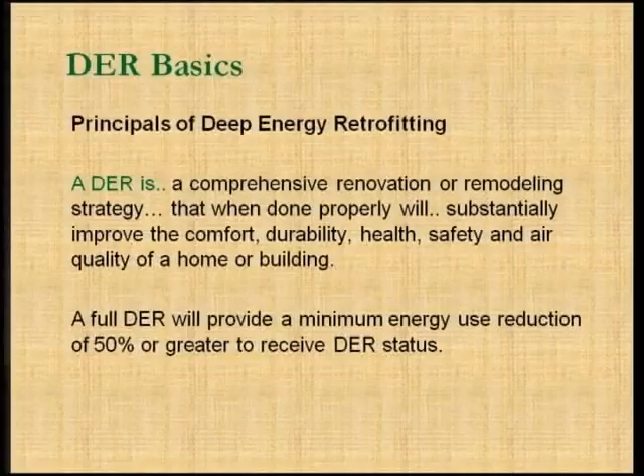There's nothing wrong with phasing retrofits, where each piece you do plans for the next piece. But once you get to that minimum 50% reduction, it's like your badge of honor to get your deep energy recognition. So this is an 1845s colonial.

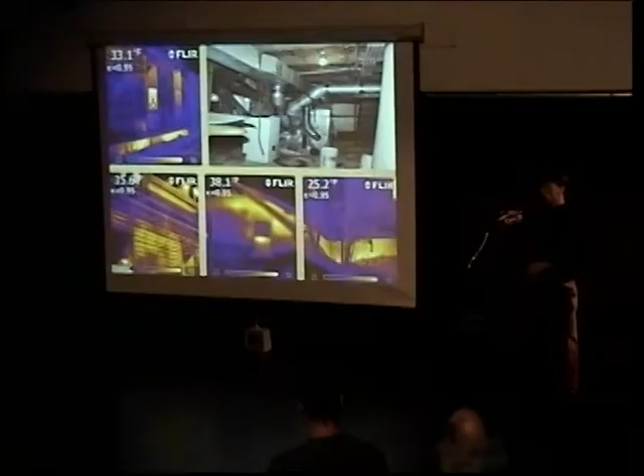As you can see with these infrared scans—for any that don't know how to read an infrared camera—from the exterior, yellow indicates heat loss and blue or purple is the colder temperature. When you're outside on a cold day, you want the infrared camera to be reading cold, because when it's reading yellow, that's the amount of heat coming out of your house unnecessarily.

As you can see to the left, the foundation is reading yellow. We've got some blotchy patches on the wall, a bunch of missing stuff up on the gable end, and of course the massive heating system it requires to compensate for all that heat loss.

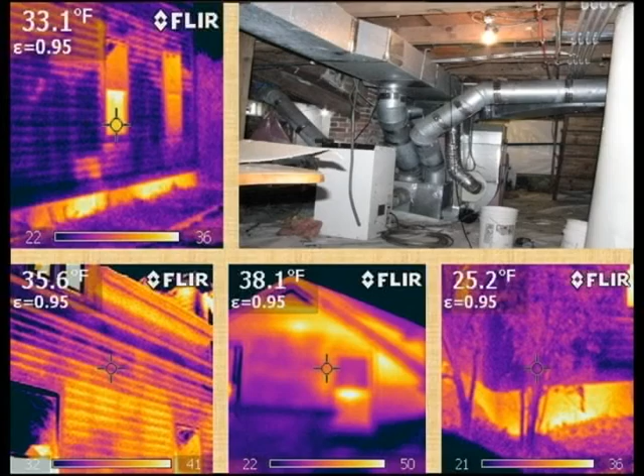And the project details: the blower door reading, a tool we use to measure how drafty a building is. It fits into a full-size doorway and creates a negative pressure in the house by sucking all the air out with a big fan, and it tells us how much air is moving through the building in cubic feet per minute. So if you figure 1 cubic foot per minute at 50 pascals, which is what the pressure is simulated at for the wintertime, we had a reading of 8,600 CFM.

Imagine 8,600 cubic feet every minute going out the window. And with that came frozen pipes in the winter, bad air quality and mold, and an old heating system that was just burning oil as fast as it could.

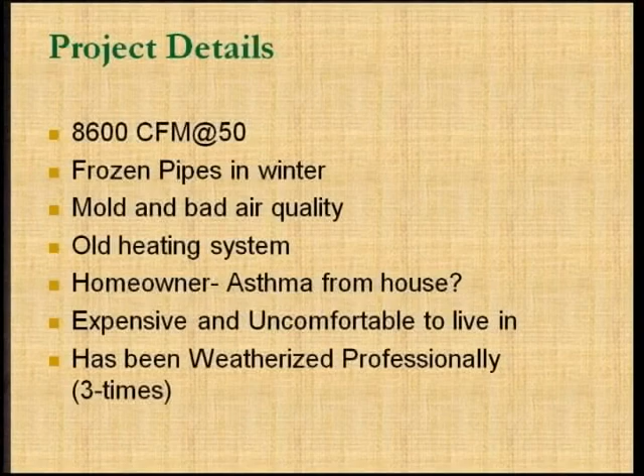The homeowners are actually pretty convinced that they have asthma from the mold in the house, and it was very expensive and uncomfortable to live in. It wasn't from a lack of trying—they actually had the house weatherized by the local weatherization programs and a professional, even after the fact. So after multiple attempts, these were still the problems that came about.

So the science behind a deep energy retrofit is no different than the science involved with weatherization work, but we just try a lot harder to get it to work out. We're still dealing with the same building envelope. The building envelope manages moisture, temperature, and changing conditions from the interior and exterior, and includes all spaces, including the basement, and whether you decide to condition your attic or not.

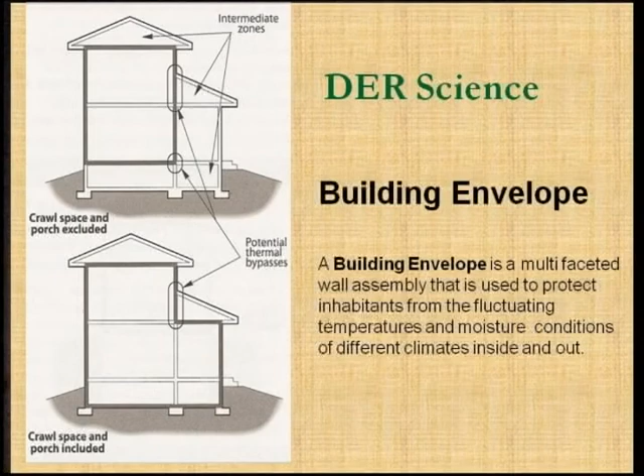As you can see here, and I'm sure you've had in your homework, there are multiple different ways you can go about defining where that envelope is. The big thing is to make sure that wherever you draw your line, you put meticulous detail into the connections at the corners and all the different components. You don't leave any sections out, because that's where the rest of your insulation can go for naught.

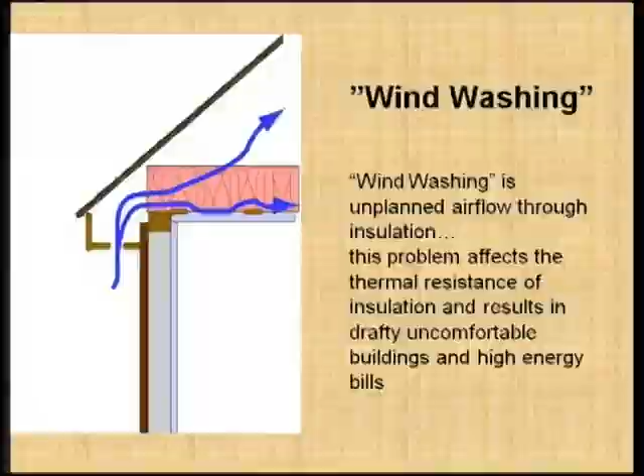Wind washing is one of the biggest problems we deal with in deep energy retrofitting, because a lot of insulation can get placed, but is it actually working properly? That's where you get these big CFM readings, like 8,600 cubic feet per minute, yet the house has been insulated—it's been dense packed.

What's going on here? There's insulation in the attic. I can't even tell you how many times a homeowner tells me, 'Well, my house is insulated. I don't know what more I could possibly do,' because they see insulation in the walls and ceilings. They just don't know how much they need or if it's actually working properly. Again, wind washing is the biggest culprit of energy loss.

Here are some infrared scans that show what happens with wind washing.

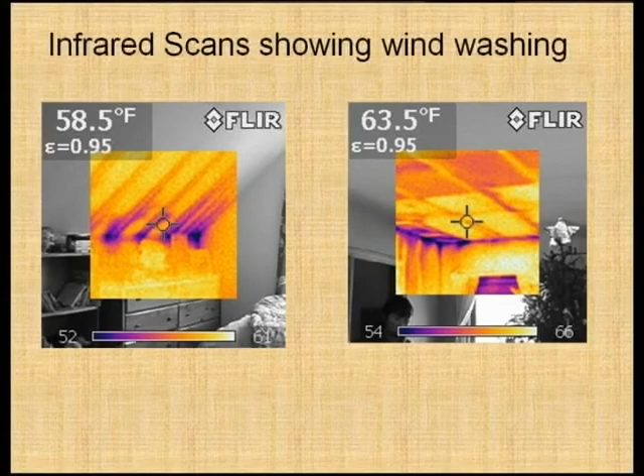This is to the left - you can see it's a cathedral ceiling that's gone up, and these ceilings are insulated with an R38, and yet there's that much cold just oozing right into the building. So as you can see, it's not about what the R value is. You're not getting a true R value if you're not stopping the air from flowing through it.

So what we're going to talk about today on this project - this is back to the Montague project that you saw - is why there's so much air flowing through the building, and why 3 different contractors have tried to fix this project and have not.

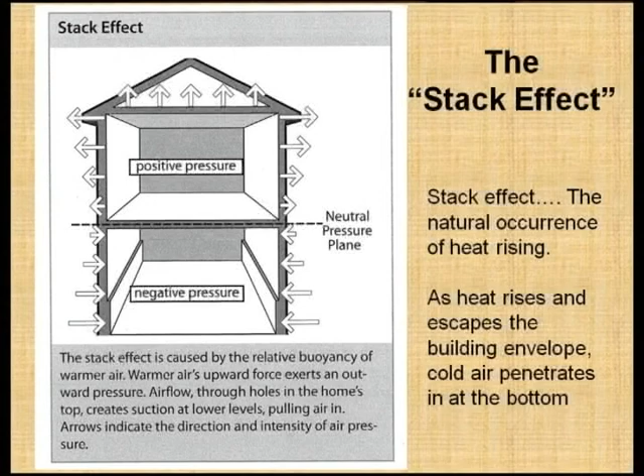I'm sure you guys are familiar with the stack effect - the positive and negative pressures of a house. The top part of the house has the greatest pressure as the heat tries to escape through the top of the envelope, but at that point it needs to draw in fresh air from somewhere, so the other greatest pressure is at the bottom. The negative pressure is at the bottom, which is why we don't always look to windows as the first place to start, because they're at more of a neutral pressure plane than at the top and the bottom.

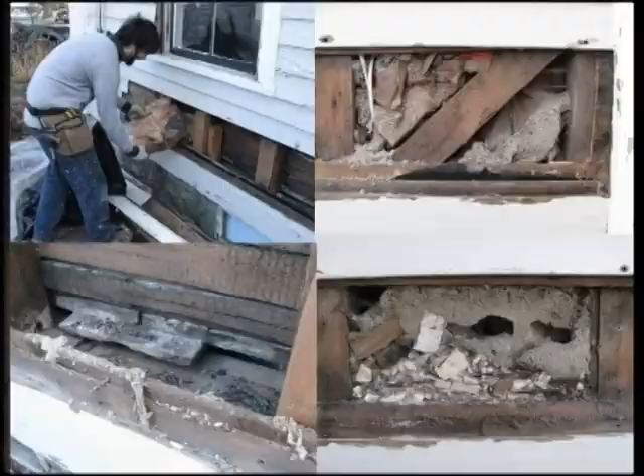So here's some up close and personal shots on what the cavities looked like. This is what ends up happening in a lot of weatherization projects - there's no budget in those programs to allow you to clean cavities and really try to do things meticulously. What they expect you to do is just dense pack on top of whatever is in there, and that's why there's so much airflow. These are the cavities - you end up with a lot of bracing, and you can't do the amount of investigation that you allow for through a deep energy retrofit.

Top left corner, you can see we're taking out chunks of fiberglass that are in there. Bottom left corner, you can see that's the sill, and it's completely connected into the basement. So what you've got here is just some random chunks of fiberglass and cellulose mixed, as well as some trash and debris. The air flows right on by that, and you get cold floors, you get drafty rooms, and it makes it so the heating system just has to run constantly.

So here's what our remediation plan was for that - basically put a good amount of time into cleaning it out, which isn't rocket science. The term deep energy retrofit does have an intimidating kind of presence to it, but really, it's the same science - you're just doing a really good job, and it's all about attention to detail. So as you can see, top left corner, we're just cleaning it out - that's no big deal.

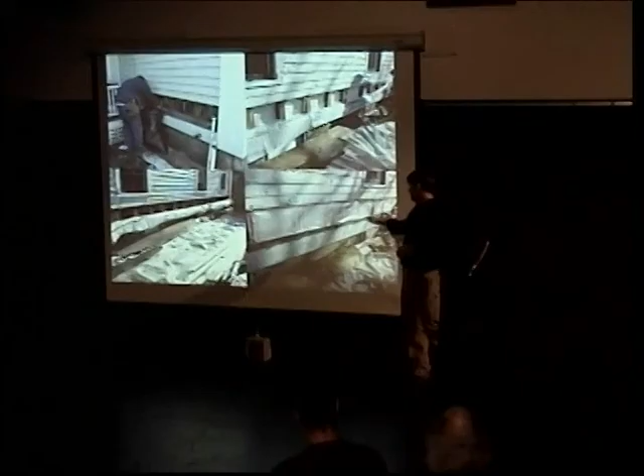We also spent some time below the rim board here, foaming and caulking. So really not rocket science at this point, right? This is all stuff that we're all capable of doing. It's just a matter of, again, doing a really good job and paying attention to what we're trying to do and thinking about how we're going to do it.

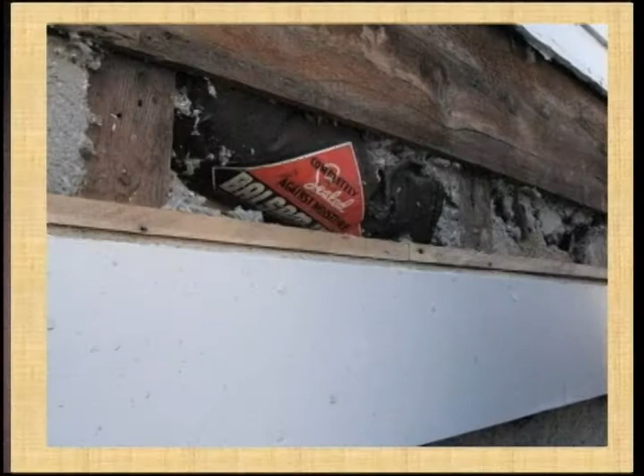I took a photo of this here because this is the old balsam wool insulation, one of the batts that was stuffed in there. You can see the label, completely sealed against moisture. I guess when it's done properly, but sitting there like that, no, it's not going to be sealing anything against any moisture at all. But it's just interesting to see how products are sold through generations and they're marketed to be certain things.

But just like anything else, if you're not using the products properly, they're not going to perform the way they're supposed to perform. So when you're doing a deep energy retrofit, it's all about making sure that the products you're using are being used properly and are working with all the other system components.

Unfortunately, that wasn't the biggest challenge of this project. Obviously, that's one of the low-hanging fruits for us compared to what we're about to get into. There were a lot of crawl spaces on this project, and we're going to see what some of the more challenging aspects of a deep energy retrofit might be, where you go where other programs won't let you go.

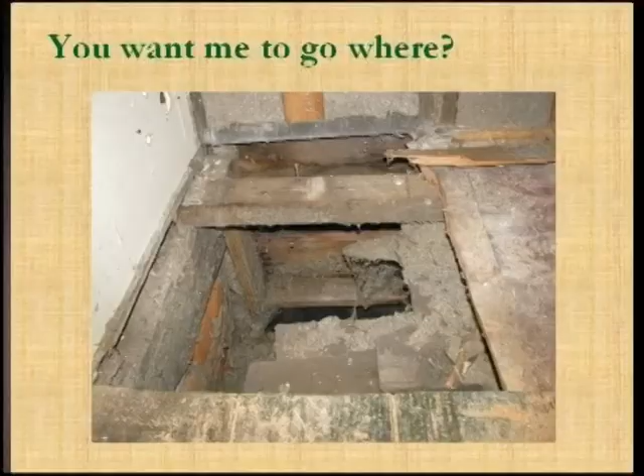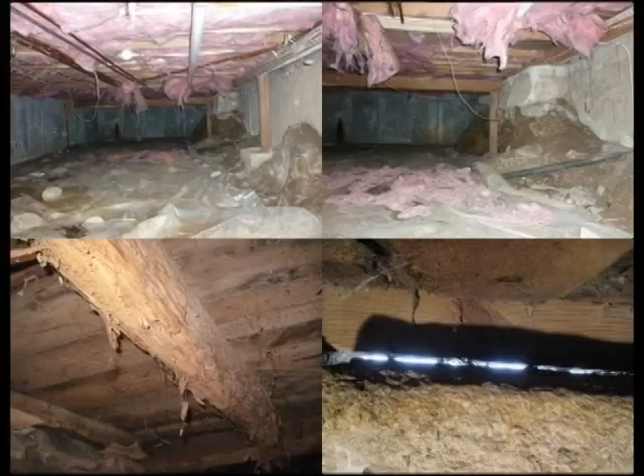So what that was is a photo of us cutting open a section of floor where the frozen pipes were. The homeowner, you got to interview your homeowners, right? They're going to tell you things that may not be building science, but they're going to tell you, well, it's a really cold room, or I feel a draft here, and you make all your notes and you pay attention so that it helps you with your targeting investigation so that you know where to start. Because some of this stuff you're just going to be scratching your head, all right, what am I going to do?

There's been numerous opportunities to do this the right way, including an addition that was put on 8 years ago, where this connection between the old part of the house and the new addition was actually a shed. They built a floor system over it and didn't bother insulating it properly, or pouring a foundation for that matter. This photo to the right is the before of the photo to the left, where we actually had to pour a new foundation footing because there were just granite slabs up on edge and that beam was hanging by the wall assembly. So there was nothing supporting that portion of the house.

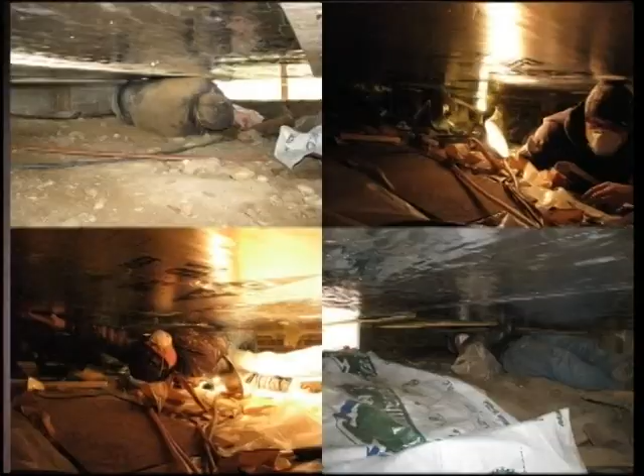You don't want to overbuild either. A lot of times you end up with floors that have got some give to it, but they've had some give to it, so as long as you're protecting it moving forward, that's the most important piece. So here you see what we did do in order to protect the wood and insulate properly is we ran rigid polyiso board on the bottom sides of all those joists.

As difficult as it might be. I mean, these are reality shots where you can barely fit your body into these environments. It's quite an interesting feeling when you're lying on your back and your nose is touching the foam board and it feels like the house is actually sitting on you. But this is what it takes sometimes. Not all the time. Not all deep energy retrofits look like this, but I'm going to show you what can happen and how to deal with that.

I can show you a couple of simpler things, like we do easier projects as well, but these are some of the things that you do end up running into, and we're going to end up coming into a time that people are faced with, okay, we've got all these old colonials, that's a classic for our area, and some of them are not going to get rebuilt, and they're not going to be affordable either, as fuel continues to rise and we merge into the 21st century where things change.

But then again, some of them are going to be repaired and restored in ways like this that make it so that they are affordable and they are a good home and beautiful historic building that a lot of people really enjoy and would put their money into in an investment.

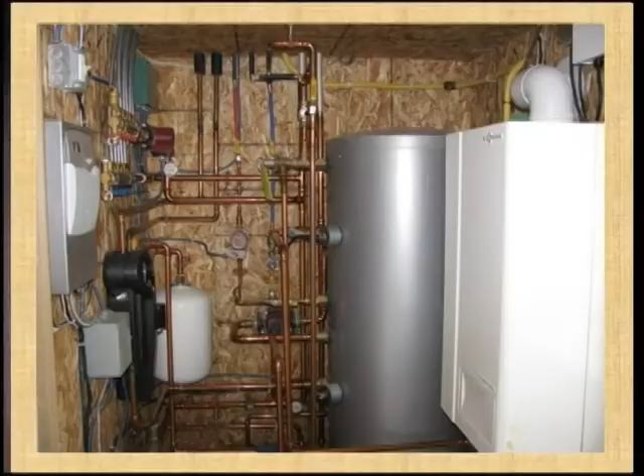So I don't have photos of the new heating system as of yet, but the utility room will look similar to this. It won't be as complicated as this one here, but what we did is because we defined the envelope at the floor system with the crawl spaces, with the basement, because there was so much mold, so much moisture to deal with, we had to pull the heating system out. We couldn't have ductwork in the basement delivering heat, pulling moisture out of the basement and sending it throughout the house. So indeed, we had to move it into a closet, which a lot of you did see.

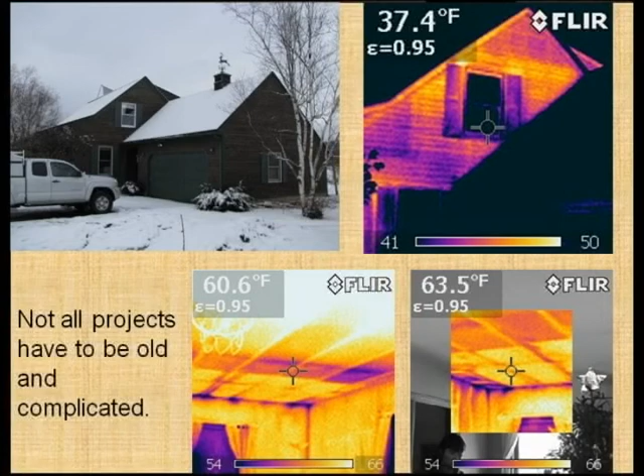Again, I told you I would show you a couple other easier projects. This project is not a 200-year-old colonial. This project is only about 40 years old. Actually, this might be one of your teacher's house. This is Teresa Jones' house, who had some work done. As you can see, it is also leaking a lot of heat out of it, but it wasn't as complicated to deal with.

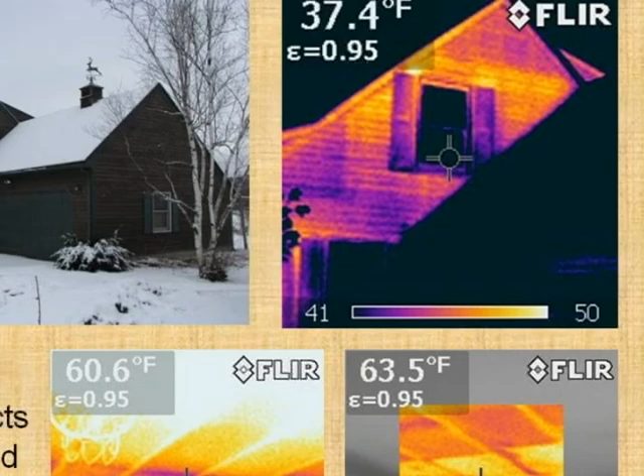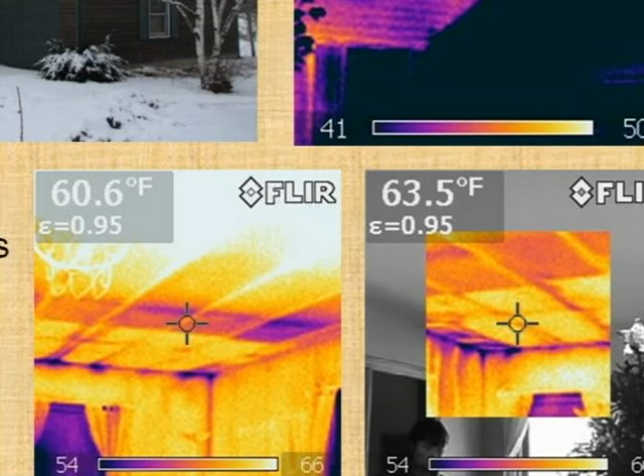The lower left-hand infrared scan shows that the outside wall, which is furthest down, is bleeding, but then the yellow indicates warm. So from the inside, you want your scans to be yellow because you're warming the building. The blue indicates cold coming in, so different than the exterior. The exterior, you would have wanted that to be all blue or purple. The interior, you would have wanted that to be all yellow.

So as you can see, the cold air is getting past the insulation midway into the house. So even though there's insulation in one of the knee wall spaces, here's your roof, here's your insulation, and then there's your knee wall, it's bypassing through wind washing and getting into an area where there's no insulation.

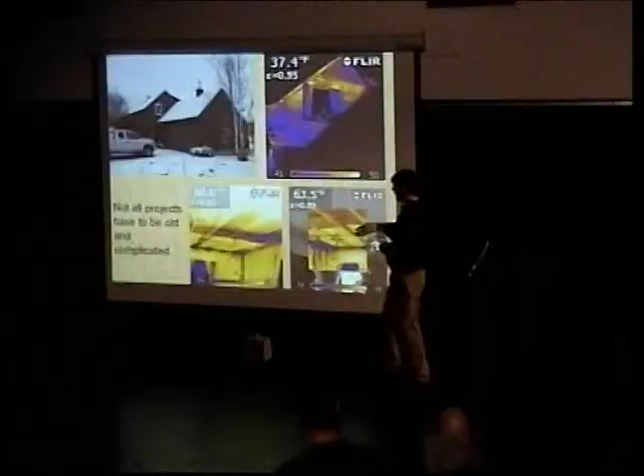So a simple fix for us was to get up into the knee wall area, pull up the plywood, pull the fiberglass out, put some end blocking where the connection, let's just say that if this here were your knee wall, we would put end blocking in the floor joists to make it so that when we dense pack the floor, it had a place to stop and pressurize against. And you meticulously air seal it. Not rocket science, but makes a huge difference.

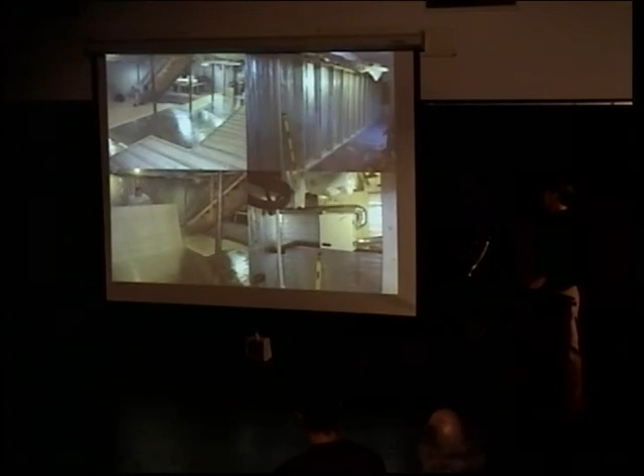In this project, her basement was one of the bigger priorities because of a certain amount of radon gas, as well as the fact that it was uninsulated, and having a playroom for the kids.

So again, deep energy retrofitting, it's basically stuff we already do, but we're doing a good job, right? We finish basements all the time as carpenters and contractors. That's something that we do. But doing it the right way is the key. Fiberglass insulation is not the right way to deal with an underground basement.

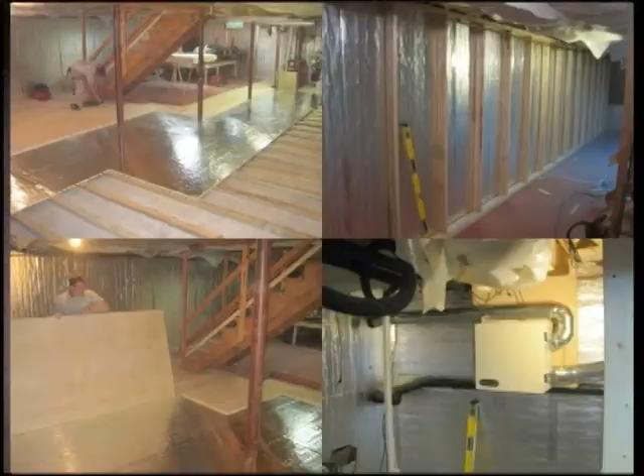So what we've done here is we've run pressure-treated sleepers on the floor, and then we've done 1-inch polyiso over that, which makes it so that any vapor diffusion that does come up can circulate under there, because there is a sump pump and there's only so much you can do. But at least we know where the vapor barrier is, and what happens under there is rated for that.

We used the same polyiso on the walls before the stud wall was framed up, and then we used soy-based birch plywood as a sheathing for the floor and the walls. And maybe at some point she'll give you a field trip and show you around, because this is a phased retrofit. We haven't done anything to the walls, but what we have done, we've done the right way. Again, it's not all about killing yourself, trying to assume that it's all or nothing, but if you do something, just do it right.

We've installed a ventilation system, again, because radon was one of the concerns, and when you think about it, just allowing radon to do what it does versus stopping it and then ventilating it, that's the key. That one was, I think, 240 CFMs. It doesn't take much.

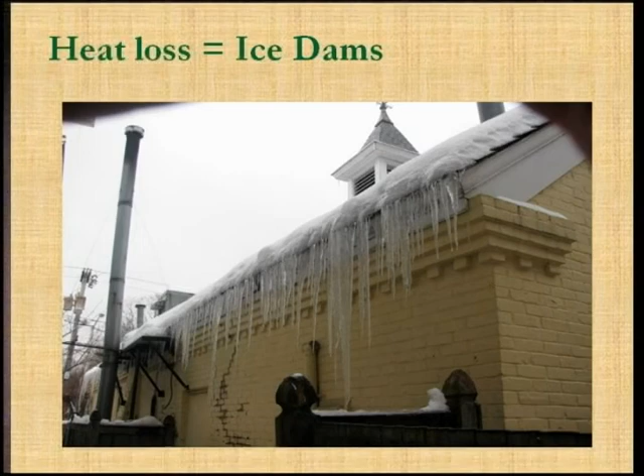As you can see, they had an interesting concept when it came to ventilating the roof. A lot of builders are kind of programmed to think that roof ventilation, soffit ventilation is just mandatory, that's it. Shingle manufacturers won't back it up unless you vent the roof. You're going to end up with moisture problems unless you vent the roof. You're going to have all this going on unless you vent the roof.

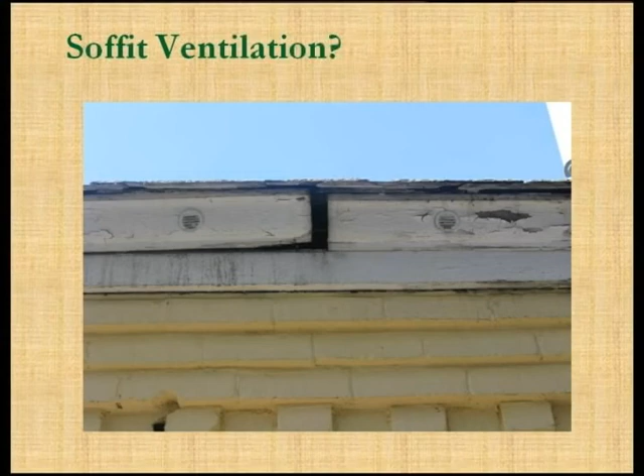And a lot of people will actually sell jobs based on venting roofs that have never been vented for over 100 years. I see it all the time, and this in itself does not create any ventilation. These little hockey pucks that they drilled into the crown molding really are just a shame. And this is what we got when we opened up from the outside.

The thing of it is the project had cathedral ceilings, and you couldn't see what you needed to see from the inside other than with an infrared camera. And really, what do?

You've got to then start to plan out, okay, we realize the building is drafty, we understand it's costing a fortune, but what do you do? The investigation can be tough.

The big thing that made it so she had to commit to this project was that the heating system died, and they had hot air running through the rafter cavities, 2x6 rafter cavities. So it was either replace the existing system, or not. I don't know if any of you have been in the brewery recently, but 2-3 years ago in the summertime, the upstairs dining area would be sweltering hot, and there was nothing they could do to cool it. They'd run the air conditioner constantly and couldn't cool it. Downstairs, same thing.

Even in the wintertime, it would overheat upstairs while freezing downstairs, because of pressure dynamics - heat rising, cold air coming in at the bottom. Really there was nothing they could do, and changing the heating system wasn't going to change the level of comfort. So unhappy customers made her want to investigate further, as well as the fact that they're committed.

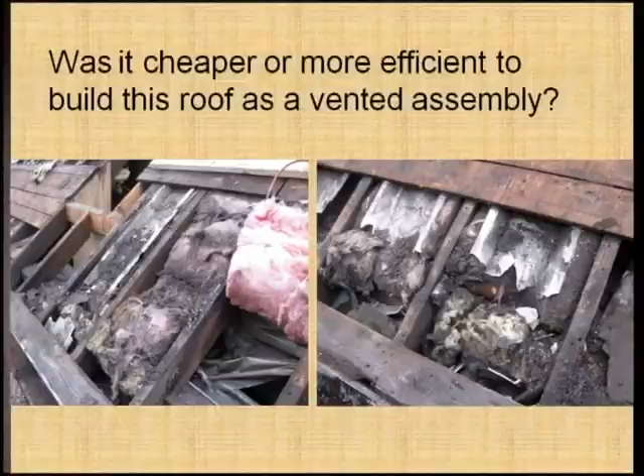As you can see, what we've got here is the soffit ventilation - these are the chute vents. What that's there for is to allow for an easy passage of air to flow. So you think about it - easy passage for air to flow means air is definitely going to be coming through there. You've got to make sure it's going where you want it to go.

These are only 2x6 rafters we're talking about, so you have to be really cautious about where that air is going. As you can see, there's been no attention to detail, and the air could go wherever it wanted. So it was trying to condition a building with no upper envelope.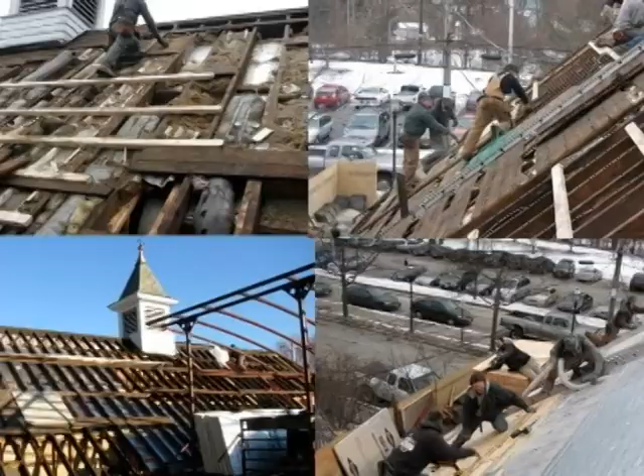As you can see, we're diving in a little bit further. The upper left-hand corner - look at the amount of ductwork that was in those rafter cavities. That's what it took to heat and cool the building.

But the trouble is, by the time it even got to where it needed to go, with no insulation, that temperature - whether it be summer with 120 degrees pounding on the roof, or winter with sub-zero temperatures - by the time that hot air heating system tried to deliver heating or cooling, that air was pretty close to the outside temperature, which made it counterproductive. So you spend a fortune creating energy, but then delivering it, you lose 95% of it.

So what you see here to the left is we stripped a 200-year-old slate roof to do this. And, you know, trying to work with a client and tell them, look, this is what we're going to have to do - that's some pretty serious trust.

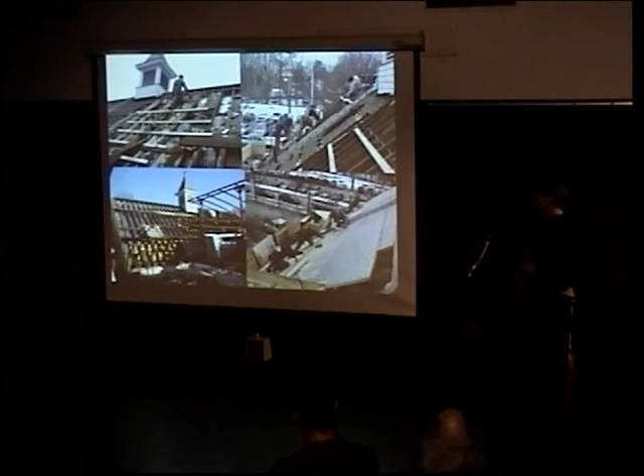Establishing a relationship with your customer in order to be able to do things like that takes a long time. You've got to work with them and educate them on a level that lets them make a confident purchase decision. You can't just assume they're going to buy right into it. It takes patience, it takes time, it takes an understanding that is different than your own.

Which is why we put a lot of work into understanding our demographics, because you have to understand who you're talking to, what they need to know, and how they need to hear it - because we're all going to understand and absorb information differently. A tradesperson is going to relate to a completely different topic than a property owner, business owner, or municipal official, and you need that mentality when you go to explain this stuff.

Get to know and understand the personalities of who you're talking to while you're trying to present the building science, because building science will bog people down - it's like a fire hose of information. Look at how much time you guys put into studying this stuff before you're ready to start doing it. Imagine how intimidating that is for the homeowner.

So as you can see here, we've got the rigid polyiso - we're dense packing the roof, we resheathed it, and we reinstalled the slate.

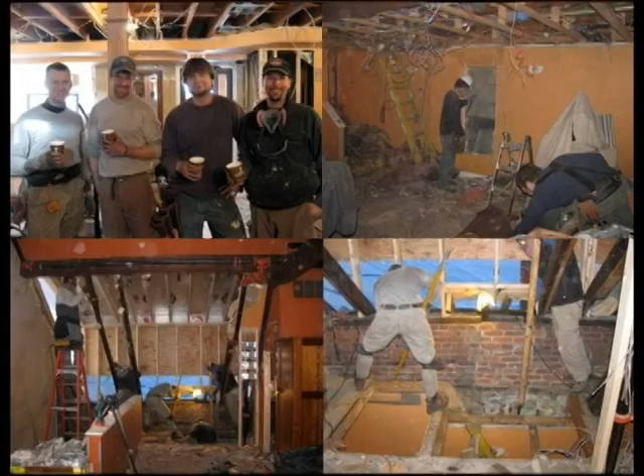This was not an easy project. We had a 10-day shutdown with 80 employees, keeping in mind that we're doing a massive retrofit to this building, which costs a pretty penny. We now have to shut the brewery down, which means a bunch of people that count on work are not going to be there, and there's not going to be any revenue streams. So you've got to be spot on about how you're going to do this.

You've got to have a team of people at your fingertips that are going to work well together. How do you communicate the information? How do you get a plumber to work well with an insulating contractor or a carpenter, when traditionally it's first come, first serve, everybody trying to get there first so they don't have to work harder than they have to?

Instead, we're creating more of an integrated team, a collaborative approach to renovating historic buildings, similar to how you'd create a football or hockey team where you've got different positions—defense, goalie, offense—all working together towards the same goal, but you do whatever you got to do to cover your teammate.

That's something we had multiple team meetings about before the project began, so everybody understood what was going to happen, who was going to do what, and how—plumbers carrying and installing sheetrock, electricians cleaning debris out of the way for an insulating contractor to come in.

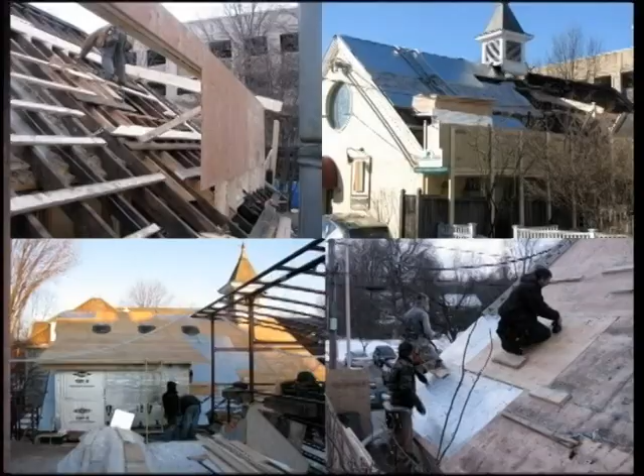Some of the nice things along the way: we had to put in an elevator because there was no handicap accessibility to the upper deck patio area. So we took out a staircase, built a dormer. Now there's an elevator that takes handicapped visitors up to the deck, and the office has now got another dormer. We built these dormers in that time frame as well.

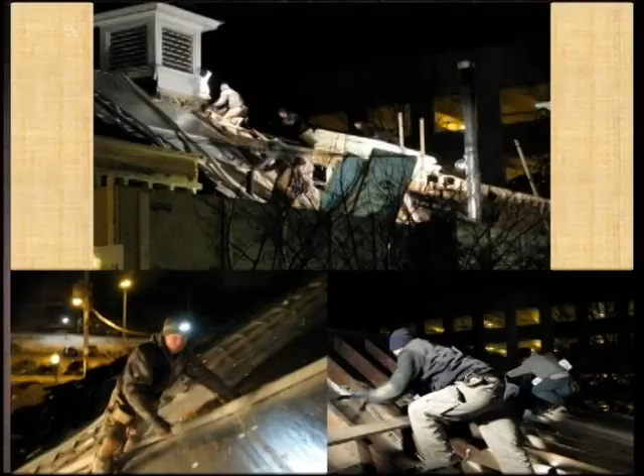Sun tunnels were being installed, all sorts of stuff, and you've got to do whatever you got to do. This is the night shift—we were working 24/7 around the clock. There was upwards of 40-some-odd people on the job at all times. So talk about seamless planning and that collaborative teamwork approach.

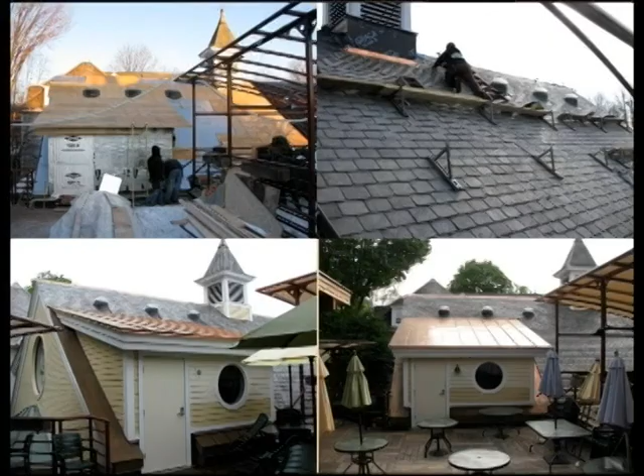Here we are reinstalling the slate, and we put in 6 sun tunnels for natural daylighting, which when you get the roof apart isn't that big of a deal in the grand scheme of things. That's when you want to start putting in the sustainable materials, green building—things that are going to help out. Here's the dormer we installed, which is now an architectural component to the beer garden.

One of the other things that prompted the decision here was the air quality. Restaurants are infamous for bad air quality, that pungent food smell that's just not pleasurable. And that's why we go out to eat—because we want to be comfortable, we want to be taken care of, to just take a break and have people cater to us.

So it's important. As you can see, the internal ductwork that was installed is now exposed—no longer in the rafter assembly—so the envelope created is now solid in the rafters with a thermal break, and the cooling system and fresh air system run through that. We put in a hot water heating system separate from that, and then the HRVs—I think we put 4 of those big ones in a closet space.

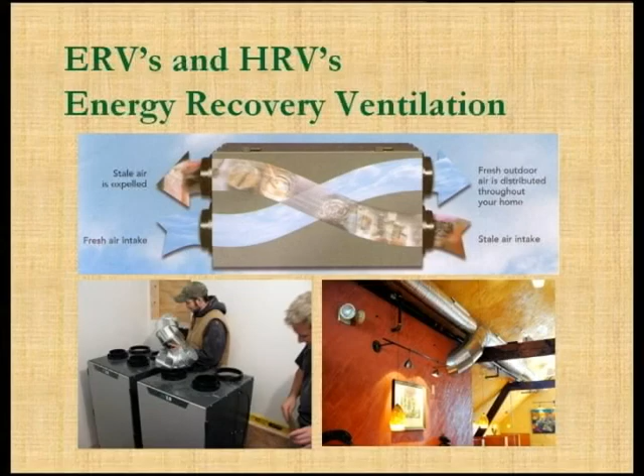We do another event called Brunching the Numbers every once in a while, where we do tours. We'll do beer tours so people can see how the beer is made, and we do tours of the whole facility and talk about return on investment and all that.

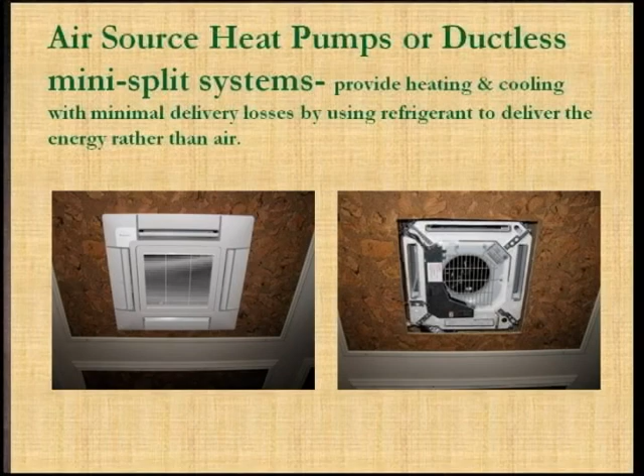The heat pump ductless mini splits for heating and cooling—basically this is like geothermal technology without ground source piping, meaning we're not putting $20-some-odd thousand into drilling wells into the ground to extract the 45, 50-degree temperatures. Rather, this is an air source. It runs with a compressor outside, the same type of setup as geothermal, except you're not getting the heat and cold exchange from the ground, which, unless you're running a commercial building, means you're spending a lot of money and embodied energy on something with a pretty nil return on investment.

Geothermal is more the sexy stuff—people who are really rich just want to say they have geothermal. It's not one of those cost-effective measures to take. Versus an air source, on the other hand, you get the same high efficiency without all that extra money. On super insulated homes, you can actually do a really affordable heating system, $5,000 to $6,000, and have heating and cooling as long as your loads are low enough.

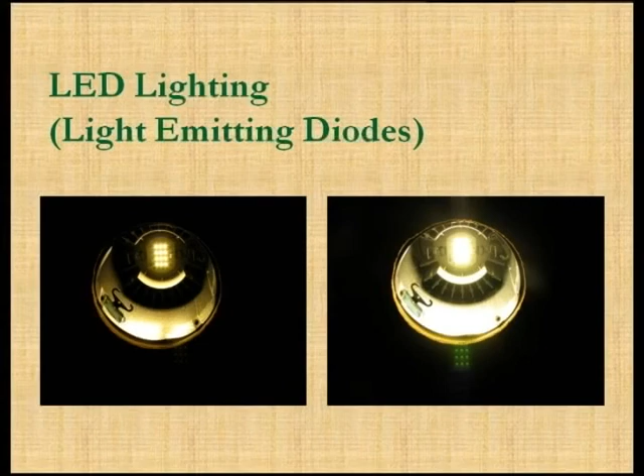We also switched out all the lighting to LED lighting. These light emitting diodes were, again, a fairly expensive investment, but worthwhile because it's a commercial application—the lights are on a lot, so it was a worthwhile thing to do.

Some of the tricks we learned along the way: there's a lens that goes on there, but even still, for a bar the lighting has to be elegant, and we couldn't get it low enough even with every dimmer we tried. Something we tried—and these are the tricks worth a lot of money, so get your pens out—you go to Michael's and get the copper or bronze screening, cut out little circles, put that into the lens, and it diffuses the light to the point where it gives off a really warm glow. Next thing you know, these LED lights are beautiful.

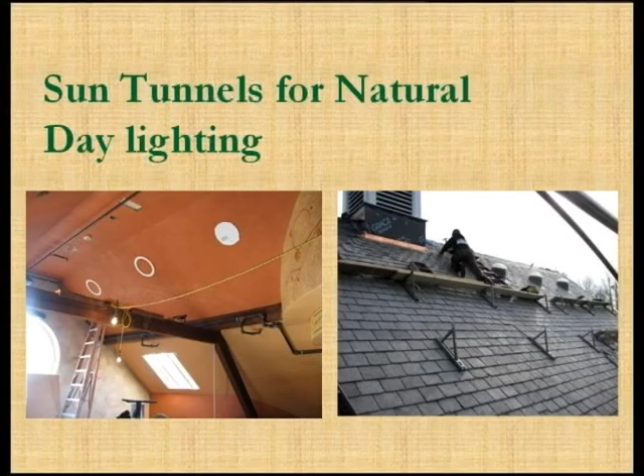Here's the sun tunnels that we cut in—another energy saving component, as well as, think about how you feel when you're in the sunlight. We like it, it feels good. But that's what we need as humans, to feel connected to the things that heal us. So installing things like that is important stuff. It may not be a deep energy retrofit, but it does save energy, and it does contribute to health and safety. That's what going deep is.

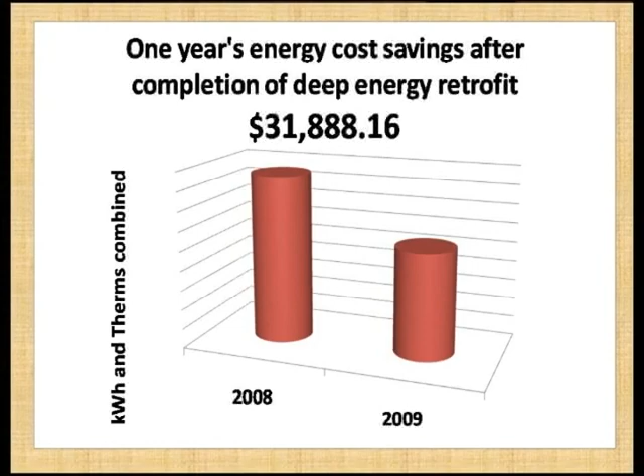All the systems together—after it was all said and done, we did our analysis 9 months later, and I haven't checked it again this year. It'll be 2 years this coming January—in about 4 weeks, it'll be 2 years. But in 1 year, they saved almost $32,000 in energy savings. So you run the return on investment: $250,000 divided by about $35,000, accounting for the fact that it's missing 3 months. And you look at the fact that now the patrons are more comfortable.

The brewery's got a green marketing edge. They're living up to their beliefs, and they're saving more money than they're spending. You roll that into a mortgage, you're saving money the very next day. How is that not a good return on your investment?

That is why these kind of projects are low-hanging fruit. Look at the amount of jobs that we're creating on this one project alone. That's how we're going to build the economy. We're going to look at projects that seem unattainable, and we're going to make it so that they are, by using case studies like this one.

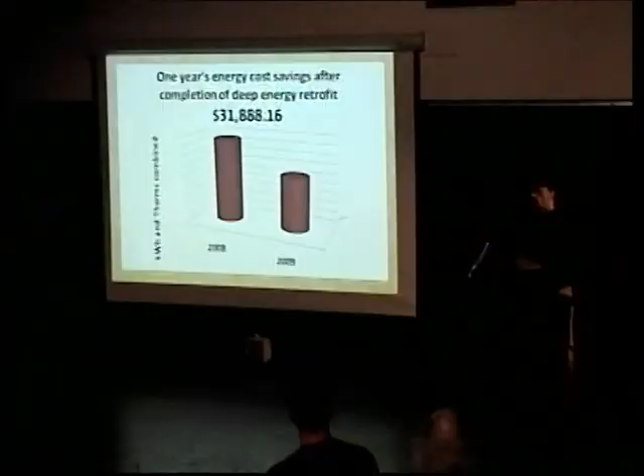Rachel, we're going to be working hard together, creating case studies with UMass, and we're going to be putting together another workshop in April talking about it. So projects like this one, the one in Montague, all that, we need all the help that we can get.

So anything you guys learn along the way, it's all about sharing and exchanging the information. That's why I'm here tonight, to tell you what I've learned. Because if I didn't tell you about this project, would you know? How would you know, right? And we're a lot of tradespeople in the room, let alone business owners or homeowners, right? How would they ever know?

So why are deep energy retrofits important? Creation of green jobs, right? Weatherization jobs are great, but does that put the construction industry back to work? Decrease of dependency on foreign oil, strengthens our country with reinvestment of capital in American communities, decreased energy bills, financial security for fixed to low-income residents as fuel prices continue to rise.

What about the brewery? That's prices today. If it goes back up to $4 a gallon, that mortgage gets paid off overnight, and that money goes right into the brewery pocket. Actually, the management loves us because the fixed costs went down. Their profits went up. Their profit sharing went up already. So they're psyched every time we come in there.

Increased health, comfort, and durability in our buildings. Who doesn't want that? I mean, that's what we spend most of our time and money on, is being comfortable and taking care of ourselves, right? We work hard, we play hard, and we want to be comfortable doing it.

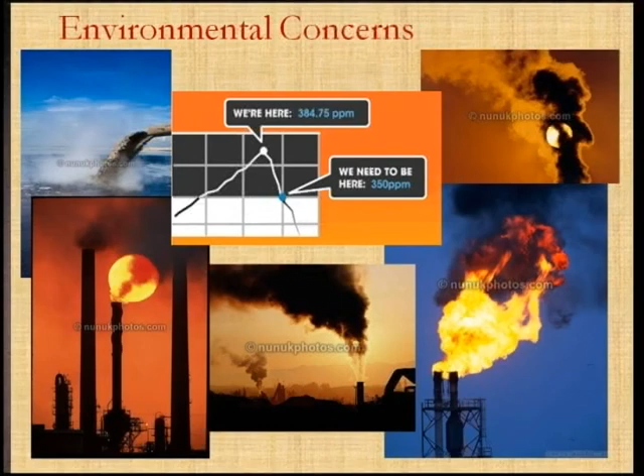And new construction, we're not going to just keep building on land that we need to preserve for farming and whatever else, with 100 million homes in this country that need to be retrofitted. We've got environmental concerns. At what point are we going to prioritize our impact on the planet? How much fuel are we going to burn before we say enough's enough?

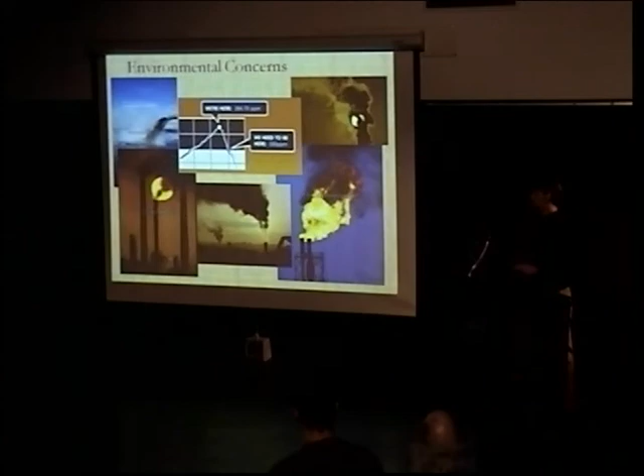I actually asked one of the guys that works for me to send me some photos of the stuff in the Gulf, and I only put this one photo because of how brutal it is. I actually couldn't even stand to look at the photos of the stuff he sent me, the whales that were beached, the pelicans, all this nasty, nasty stuff that is so disheartening to see. This is our impact on the world by doing what we do.

So at what point are we going to say that we have to do better? That's what deep energy retrofits are. That's us doing better, and coming up with ways that we can do better, being creative about it, with funding mechanisms, with incentives, working together, helping each other out. That's how it's going to be done.

The other thing, the United States was the global leader in energy efficiency in the 1970s. Germany learned from us, but they were smarter than us because they kept going. We didn't. We stopped. We pulled the panels off the White House, and we decided everything was okay the way we were going. But we can build better, and we have to. That's the way it is. We can't keep going like this.

And if all that we're going to get done is we're going to start to institute the next level of change, and we're going to experiment, and we're going to pilot, and we're going to learn, and we're going to try to figure out the best way to do this, the most efficient way, to teach the people that are going to be under us. How many people do you know that are looking for jobs, that are just trying to figure out a way to get involved? The more experienced tradespeople have to get involved with these extremely complicated projects, learn it, and then teach it. That's just the way it is.

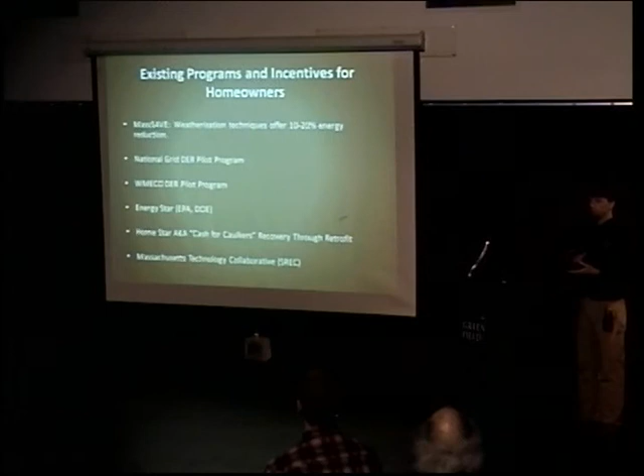I am going to be meeting with John to talk about exploring some other financing aspects as well. You've got Energy Star, which is a moving target - most of these are moving targets, so it's something you're going to have to stay up on. But Energy Star does have, for new construction, different tiers - Tier 1, Tier 2, and Tier 3, where Tier 3 I think you can get up to 8,000. Tier 2, I forget exactly what it is, but Tier 1's probably around 1,500.

Again, for new construction, I don't do as much in new construction as I used to.

Homestar - that's a program that's been kind of lurking in the distance, we don't know exactly what it's going to be, but they're looking to streamline and simplify the biggest campaign for energy efficiency this country has seen since Carter. So what they're looking to do is brand things in a way that's easy to digest for the basic homeowner, easy to execute for a contractor that doesn't have a ton of experience. They're just looking to really streamline it, and my assumption is it's all about entry level - get it in, get it started, and then we'll make it better. That's my hope anyways, because it is definitely really bare bones basics. They're not looking for anything serious, but it just gets people thinking about it. Energy efficiency, again, is now on the table. So it's good, we should support everything that does happen and continue to ask that it be made better and put in feedback. Get involved.

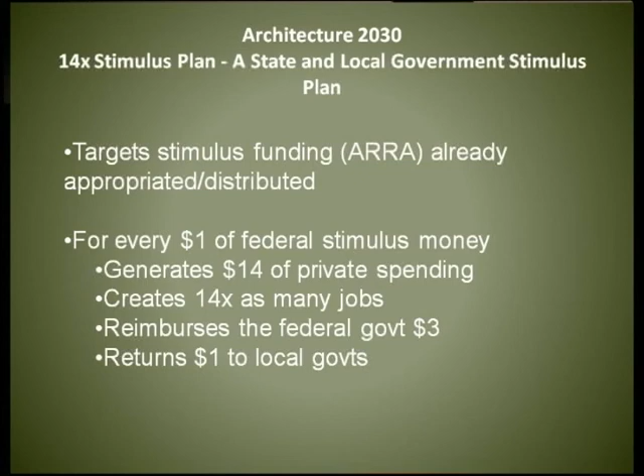Yeah. So that means that carbon neutral, whatever we put out, we're balancing. That's a pretty serious goal, seeing we're at 2011. We've got 19 years to get to a neutral playing field. And every $1 of federal stimulus money generates $14 of private spending, creates 14 times as many jobs, reimburses the federal government $3, and returns $1 to local governments.

Let's flip and we'll see how that works. It's actually pretty cool. So the original monthly mortgage payment at a 6% interest of $252,000 is $1,511. The mortgage amount, including an upgrade of about $50,000, bringing it to $300,000. Monthly mortgage payment going up to $1,799, so about $300. The government cost to buy down to a lower rate, say 4%, is $24,000. The minimum private investment is $48,000.

That's where the $100,000 comes in; most deep energy retrofits can target about $100,000 if you're really doing the whole thing. Phased retrofits, possible, no problem. But a lot of them do hit about $100,000. So with the mortgage amount and the private investment amount, about $100,000. Monthly mortgage at 30-year and 3%, 2% below the 5% average, is $1,265. The mortgage savings is $534 compared to the $1,800. The minimum energy savings is $145 a month. So the minimum monthly savings total is $679.

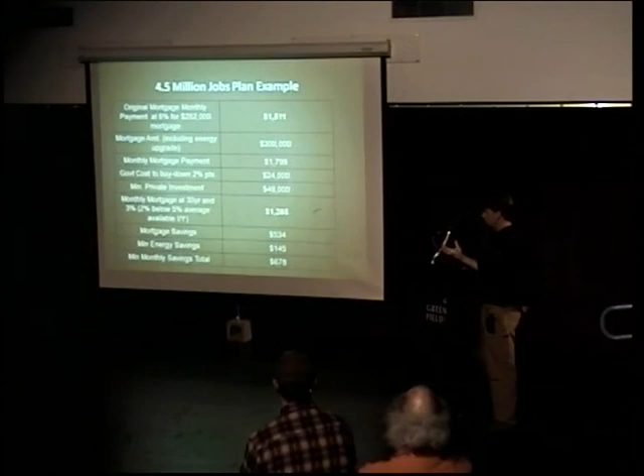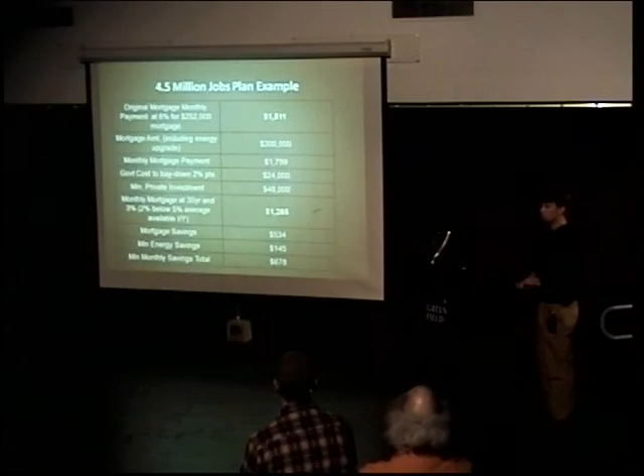And for all of you non-mortgage number crunching people, this may not make a lot of sense, but when you put a lot of time into trying to understand it, it's a creative way to use equity and fake money to make the investment and then put it into a payment program that's cheaper to do it than not to do it. And these are the ways that we have to start thinking, which is why we need bankers in the room, realtors in the room, attorneys in the room. This is not just for tradespeople and homeowners. This is for all of us, which is why we want to understand the demographics, because they need to understand a certain amount of information in order for all of us to be able to do this type of work. We need to be able to work with them on things that they don't understand.

But in the meantime, there's other types of financing that we can work with. This here was on the docket. Actually, it's been used for a couple of years, since 2008, that's 3 years now. Property assessed clean energy financing. It's financing that runs and flows through your real estate taxes.

Now, what's cool about this is basically you borrow the money, your town sets up a bond, and there's a whole process I won't get into, but it is possible and it does happen a lot of the time. And then you borrow the money to make the energy improvement on your home, and then you make your payments through your real estate tax as you would through a sewer upgrade, where all of a sudden the town wants to put in a city sewer and you have to pay additional taxes to have that. This here is the same type of thing, except now your energy bills go down, so you're really just shifting funds around.

What's cool about it is that if you go to sell your house in 2, 3, 5 years, you don't have to worry about recouping your money, because that's a lot of the trouble with refinancing, right? We can get money from a lot of different places. If we want to refinance our house, we're going to expect that we've got to pay that down. If we go from $200,000 to $220,000, we're like, okay, can I sell the house for $220,000 if I move in 5 years? So that's a barrier. That makes us nervous about spending the money. This, on the other hand, stays with the house. You don't have to pay it down. You don't have to pay it off. It stays in the real estate taxes.

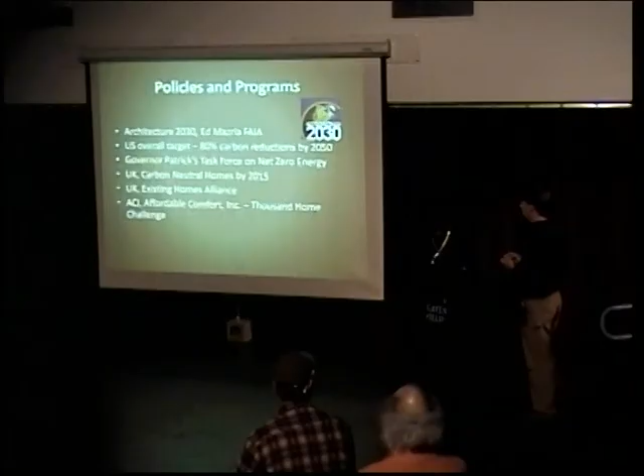Governor Patrick's Zero Net Energy Task Force, which, as I know, isn't really doing too much right now. But this is where we, as individuals, call up the governor's office and say, "What's going on? Is there anything happening?" And we just keep reminding them that it's important to us. Which is why we assembled the consortium, so that we could have a louder voice.

One of the original intentions that we had was to be able to lobby on behalf of the needs for incentives and financing and all these different things, especially when we had the Bush administration in place. It's been a little bit different now that Obama's been in, but this is something where the squeaky wheel gets the grease.

United Kingdom, carbon neutral homes by 2015. That's only 4 years away. So you can see that our goals are a little bit different, where you've got Sweden that's going to be fossil fuel free by, what was it, 2020 or something like that. All these crazy-sounding ideas, but in actuality, these are good goals. And you've got the Existing Homes Alliance. These are great programs to look into, because we can see what other countries that are paying more for fuel are doing. Affordable Comfort Inc. and the 1,000 Home Challenge.

Other prospects to look out for: revolving loan funds. This is something that I've been playing with. I wrote a grant with a pretty big team of people about deep energy retrofitting what's called a 667 project. These are projects that were built in the 50s, 60s, and 70s for income-qualified, elderly, disabled people, brick buildings all across the country.

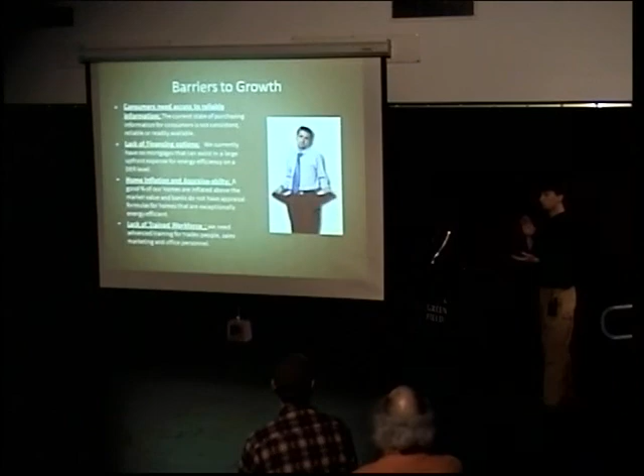This means that they need to hear it from more than one person. They need to hear it over and over again in ways that make sense. It can't be something completely different from 5 different people, because what's going to happen? The project's just not going to happen, right? Of course it's not going to happen, because they won't know who to believe. So that's one of the most important things that we all collectively have to work on, because you don't even know you need financing until you're told what you're trying to finance, right?

So what's step number 1? You need to know what you can do and how to do it. So information is very important. The next barrier, financing options. Okay, I know what I need to do, but how am I going to pay for it, right? So that's a big barrier.

With that financing problem comes home inflation and appraisability. Okay, yeah, we just went through 15 years, not even really. I mean, in 2002, I bought my shop, an 8,000 square foot building, for $85,000. And at the time, I was nervous about it because it was in East Hampton, and I was like, I don't know if I need that kind of a mortgage. But then sure enough, overnight, it's worth like $300,000. Why?

Because when the stock market crashed, this is one of many reasons, but this is the one that sticks with me the most. When the stock market crashed and all the investors took their money out of the stock market and started playing with the housing market like it was Wall Street, where you're going to buy and sell, we're going to flip homes, I'm going to buy a house, I'm going to not even do anything to it except for cosmetic stuff, and I'm going to sell it for $50,000 more than I bought it for, things like that, or even just buying and selling alone.